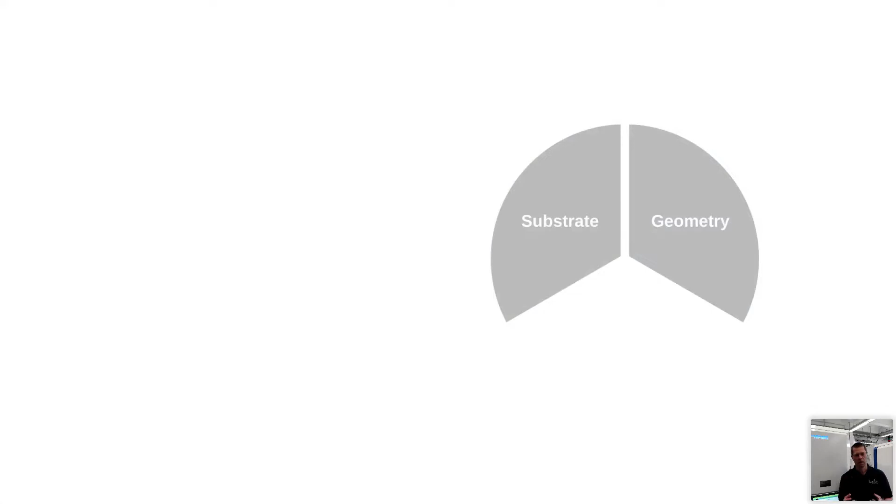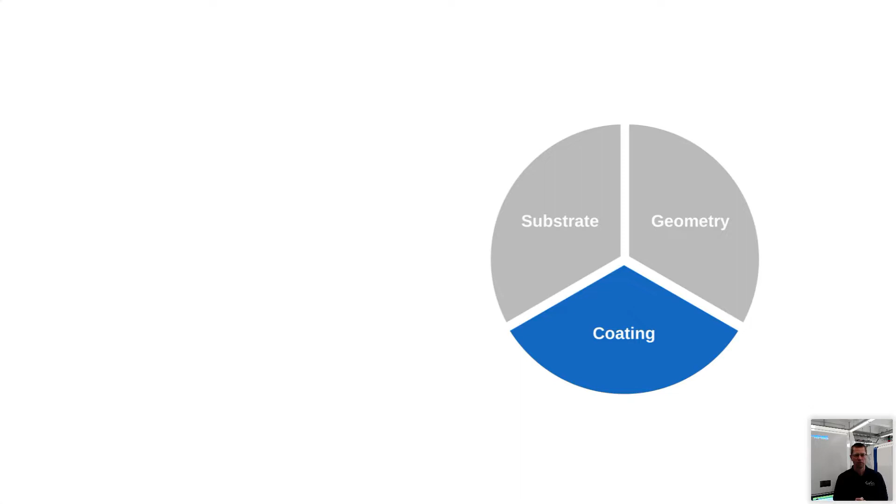Well, to bring us into the topic, and I see the team is already working on the first questions which are flying in, I would like to start with a very small introduction to bring us all on the same page and into the topic. You are a tool maker, and you know that a high-quality cutting tool needs 3 ingredients: the substrate, the geometry, and then comes the coating. And we would like to show you how these few microns on top of your geometry will change the game and will help you to boost the business.

And I think you will agree, as a cutting tool expert, that only a coated tool is the final and the perfect product. The whole thing is about joining your competence as a tool manufacturer with our competence as a coating company. And all together, we will form a result which gives a benefit to your final customers and in the end helps you to improve your business.

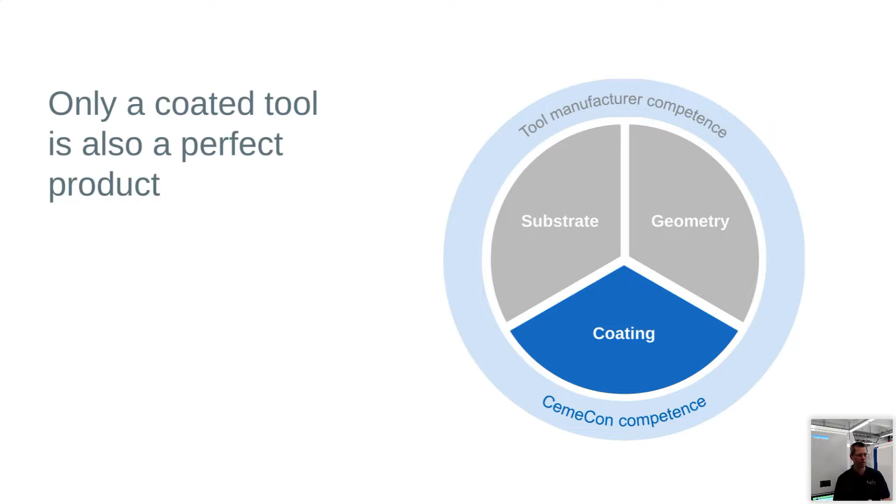So we already have the first question. Good. And it seems to be a very urgent one: availability and lead time for spare parts. Probably something that has been asked by lots of customers. That's a very important question at the moment because you have all probably experienced how difficult the supply chain situation is at the moment.

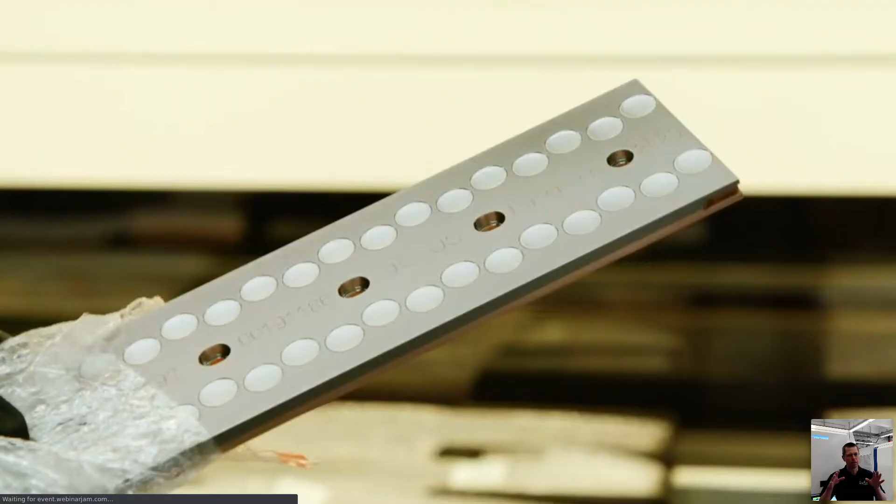The good thing is this device is really made here in Aachen. Here in this premise, we have a huge job coating center, actually the biggest one for cutting tools in the world, with machine building and R&D in the same place. All the equipment we are building here is designed here and made here. And the key suppliers are within, let's say, 100 kilometers.

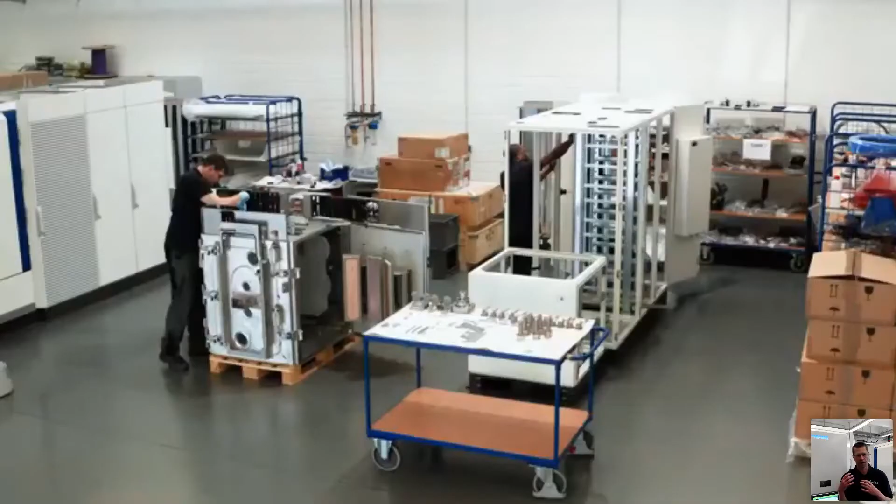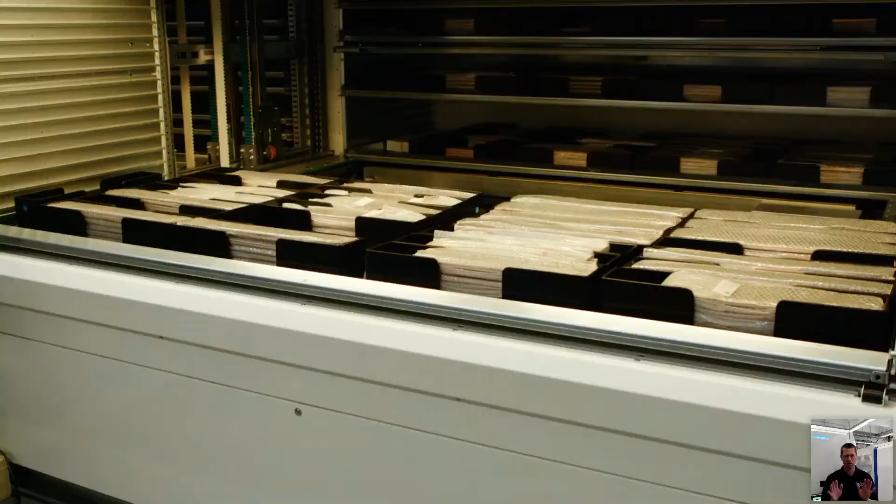We know that such a machine is vital to your production. So we have a huge stock of spares, which is a very big help, especially in the given situation where getting components might be quite an issue. So don't be afraid, we have a huge stock, and in 99% of all cases, we ship within 24 hours and you get a spare part so that your machine is back on stage.

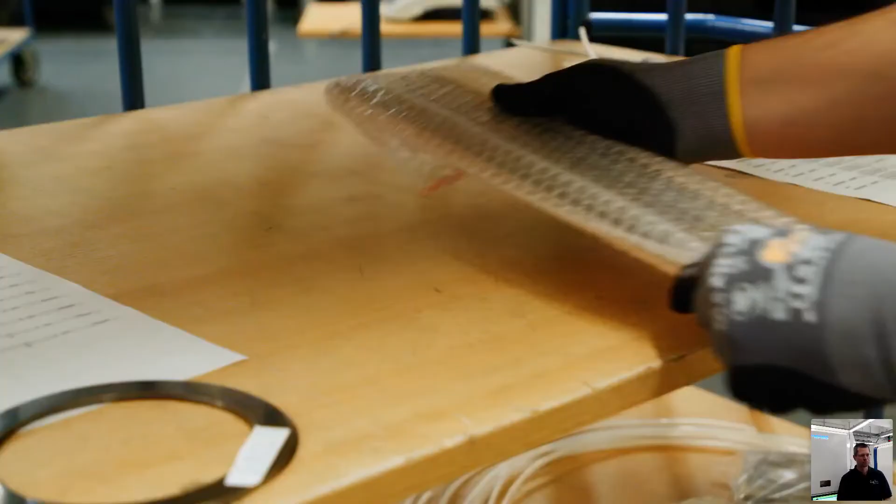Next question comes from Laura, and she wants to know what distinguishes CemeCon coatings from others. Interesting question. Thank you, Laura. Well, when it comes to a coating, it starts with a chemical composition: titanium aluminum nitride, aluminum chrome. This you can do with a lot of technologies. It becomes very different when we're transforming the chemical composition into physical properties.

Then comes this buzzword HiPIMS into the game. HiPIMS, high power impulse magnetron sputtering. It gives a fine-grained morphology, dense coatings without any droplets, and this changes the game totally. A different set of physical properties gives a known composition a fully new meaning on your cutting tools. So here we have something which distinguishes CemeCon from all the others in the tool coating world. And the third thing is what we call engineering.

The way we apply a coating: coating is a process which starts after grinding with cleaning of the tools, with edge preparation, for example, blasting. All these details like how to batch something, what to put into one chamber, we have detailed in 35 years of experience. And a very important thing in this is the preparation and the evaluation of the cutting edges.

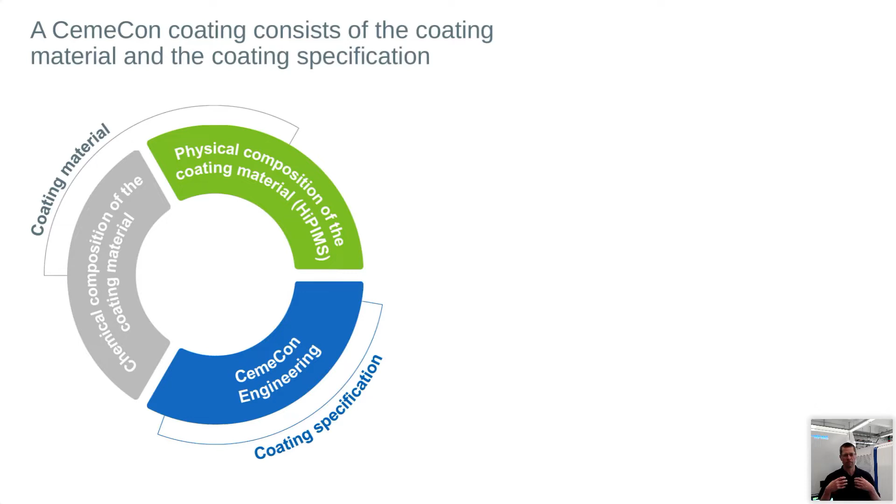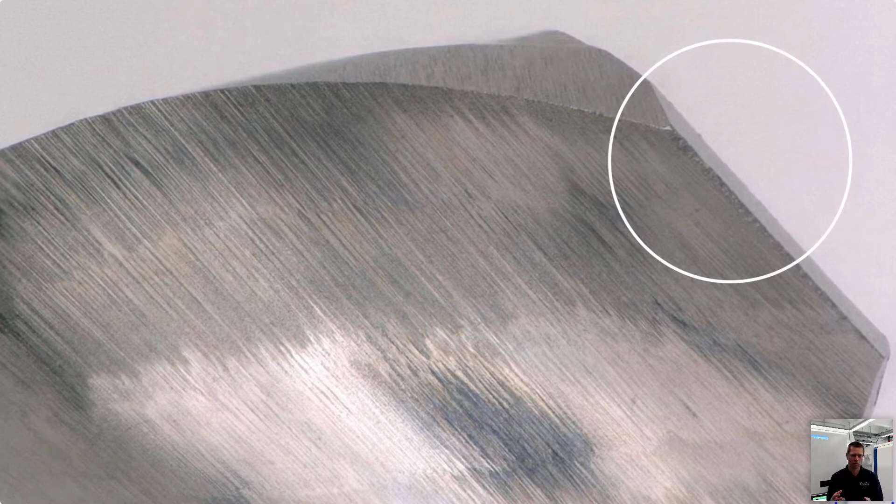And here I would like to show you a drill. The cutting edge of the drill, you see, is not perfect. Here you see quite some deficits on the cutting edge. Something could be done to make it better in the performance of the tool, so that a good coating can unleash its full power when we make the cutting edge more homogeneous. And one possible solution for this is edge honing, making the cutting edge homogeneous by wet blasting, for example.

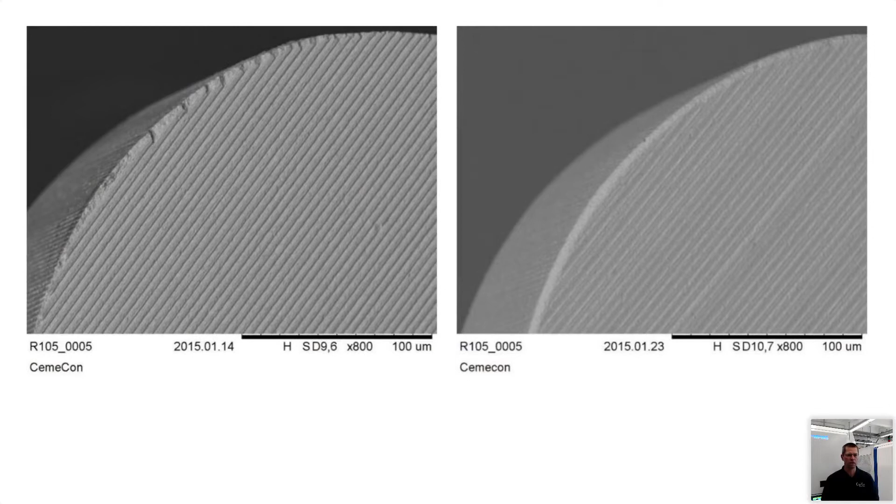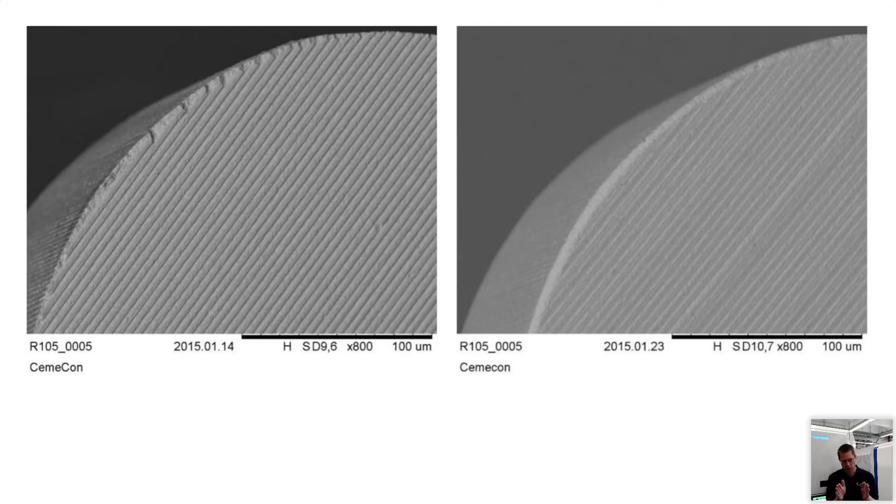This is a technology which we normally use for carbide cutters to support the cleaning and to make the cutting edges more homogeneous. That's what you're seeing here, this nice animation of round, the typical style inserts. On the left-hand side, a perfectly ground and honed insert, but still you have some marks, some scratches in the cutting edge. And on the right-hand side, you see after wet blasting, the cutting edge is by far more homogeneous.

And of course, this is a big benefit when it comes to the performance of your tool together with the coating. So this is a big benefit or a unique thing of CemeCon. From all our experience, we know how to convert a very good cutting tool into a perfect one and then apply the coating. And this technology, we are more than happy to share with you and to transfer it to you.

Next question. We would like to be more aware about HiPIMS technology. What are the pros and cons of this technology? Yeah, very important thing. Well, when we go back into the history of PVD coatings, the first technology was arc deposition technology. It means you run an arc on a target. The arc melts the material, evaporates it into the plasma. The big disadvantage of arc technology is that you always have droplets, unmolten particles on top of the coatings, and you have these voids in the coating. The other thing in arc technology is you have a tendency to high stresses in the material.

The other technology is sputtering. The same thing happens here like in a light bulb. You take a target and you bombard it with gas ions, and you take the material out atom by atom. The big thing in HiPIMS is high impulse sputtering. You do sputtering with way more energy in the pulse. So you take the advantage of sputtering, a droplet-free smooth coating, and you apply more power, which helps you to increase adhesion of the film. And here I think we have a very nice animation to show you the differences in the technologies.

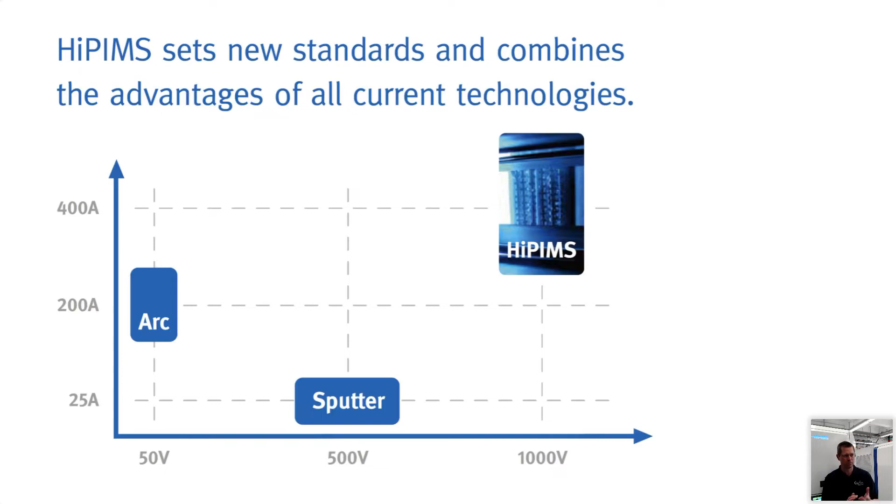Why is HiPIMS so different? Because in this new technology, you have in the pulse high amperage and high voltage at the same time, which gives you a fully different level of power, ending up in a dense coating with a fine-grained morphology. I think also for this we have a nice thing prepared showing you what the benefit of the HiPIMS coating is. Maybe we could bring it in. Yeah, perfect. Thanks a lot.

So what you see here, a 12 micron thick PVD coating, all the 12 microns through, a fine-grained structure, a fine-grained morphology. And the other message is 12 micron. Obviously, the other big thing in HiPIMS is managing intrinsic stresses. Otherwise, it would be impossible to do a coating as thick as 12 micron. That's a big advantage, either for thick coatings on inserts or when we are going to very tiny round shank tools for dental applications or for cell phone cutting. Then you have super small cutting edges which are extremely sharp. Also there, low stress, a dense coating, a big benefit.

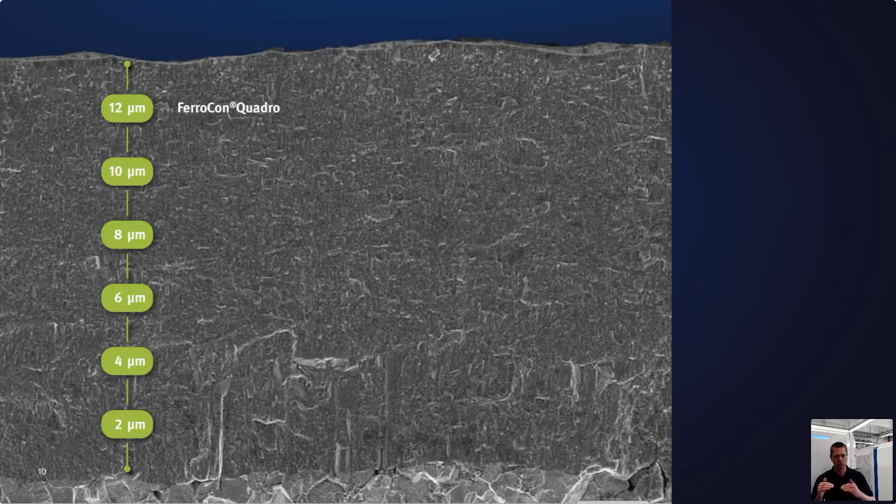Matthew wants to know, can you explain the adhesion of your coatings versus arc technology? Yeah, thanks for this question. A very good question. Why is HiPIMS gaining that much ground in the cutting tool world in the last years? Well, basically, it takes the good things out of both traditional technologies. It takes the versatility of sputtering. Basically, you can sputter every material. You can do it on CBN, you can do it on ceramics. You are smooth, you are droplet free, and it combines it with the advantage of conventional arc technology that you have lots of power giving good adhesion. HiPIMS brings both advantages, from both worlds, into one technology.

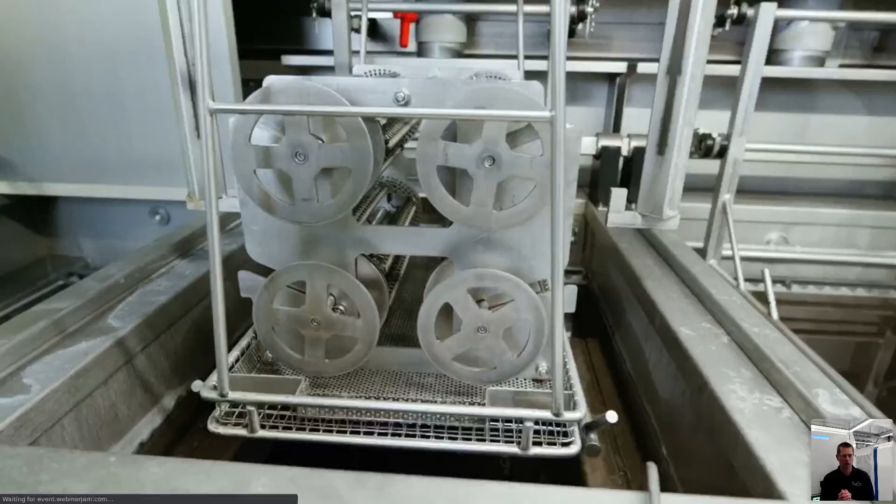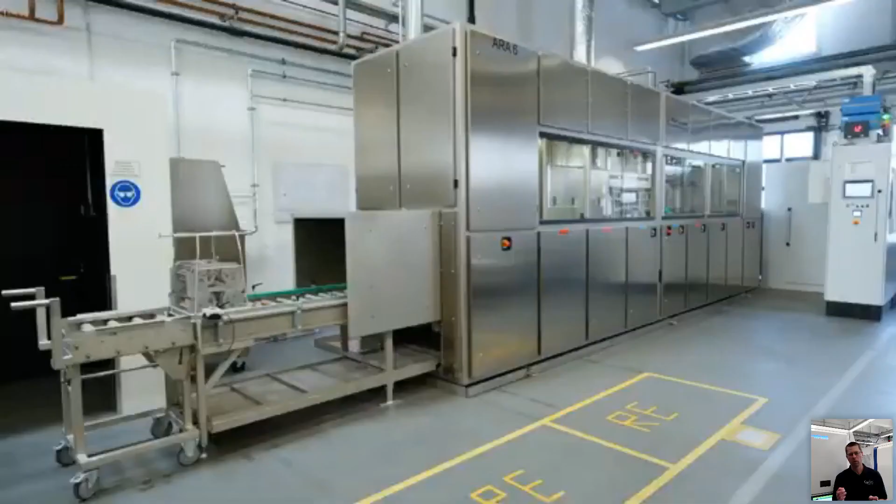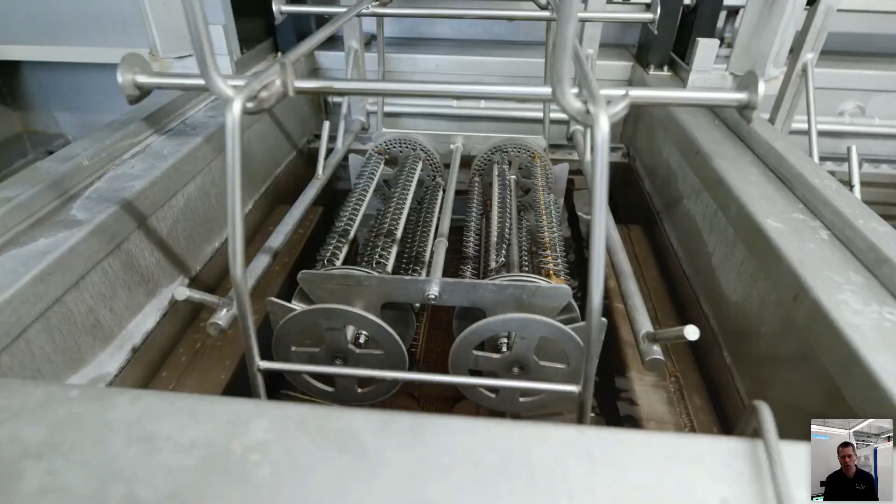Very important to remove everything on the tools. We had some discussions about regrounds. Regrounds pretty often have residues from the previous machining or from the grinding. Please take care in the cleaning that all these residues are away. So what you are seeing here, a cleaning line, is a very important part in the workflow. And here we can help you with all our experience to give you the right advice for what machine or what cleaning unit you should use.

The second important thing is when you are giving your tools to a job coater, probably having just 2 or 3 units, plus you set them under time pressure because your customer is waiting, then they need to make a compromise, mixing your probably small tools with the big tools from anybody else into one chamber, into one run, which of course is a compromise. You, as a tool maker, know what tools are coming down your production stream.

So for you, it's easier to have a uniform batching of, let's say, similar tools. Just this improves your quality. That's the same thing like when you put into your washing machine white socks and red socks. Afterwards, the white ones will be a little purple, which you don't want to have. So just by more uniform batching of just your tools, you get a better quality.

A new question. Getting back to the big tools, is there equipment for circular saws with max 150 millimeters diameter? Well, 150 millimeters diameter, absolutely no problem in this device. Table diameter is 400 millimeters for the HiPIMS unit, so 150 millimeters will work easily.